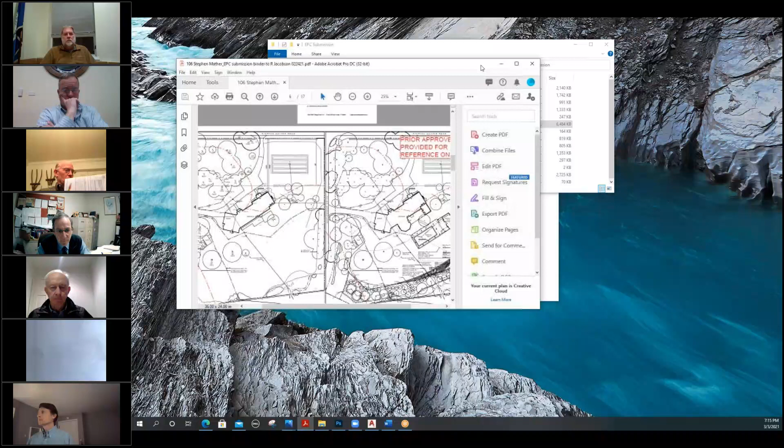And so we've submitted our plans. I'm happy to share a screen if that's helpful. I can take you through the plans. You've probably already seen them. Please share the screen. Alan, you should be able to present. There you go. You've got to make it a little larger. Please. Okay, are you able to see that now?

Yes. Oh, yeah, great. So the plan you're looking at on the screen right now is the plan that was prepared by Dan Gordon, landscape architects, in 2018, which proposed the pool house, etc. I provided it for reference since there was a history of applications and approvals on the property.

Our plan is down below, bringing the pool up closer to the back of the house and getting it further from the wetland as far as possible. This property is a very tough one because most of the backyard is regulated area with a very small area of upland review. We also rearranged the way the rain garden would work, and we're proposing a 5,000 square foot mitigation planting in the area of lawn.

It's predominantly lawn, almost this entire property. Our proposal is to remove 5,000 square feet of lawn in that lower southern area adjacent to a small intermittent creek that is back there, based on information prepared by Alan Pilch, the stormwater management engineer. On our plan we show the planting for that area, a mix of trees and shrubs, consistent with what was already proposed and approved by the prior landscape architects, which would filter runoff and mitigate that lower area.

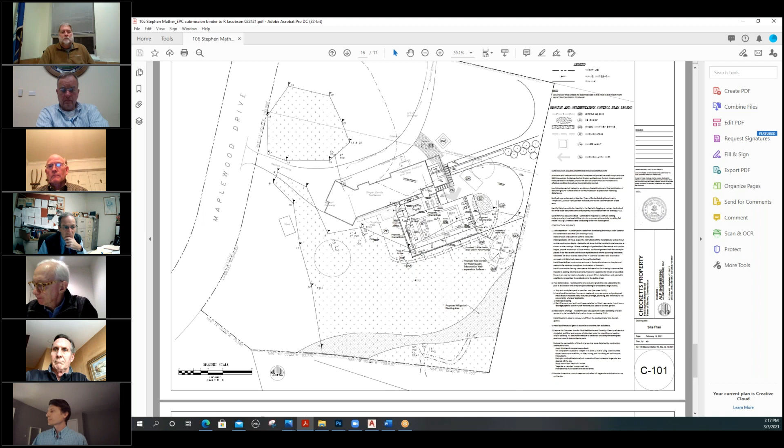The stormwater calculations have been included in your packet, as well as details regarding sedimentation and erosion control devices.

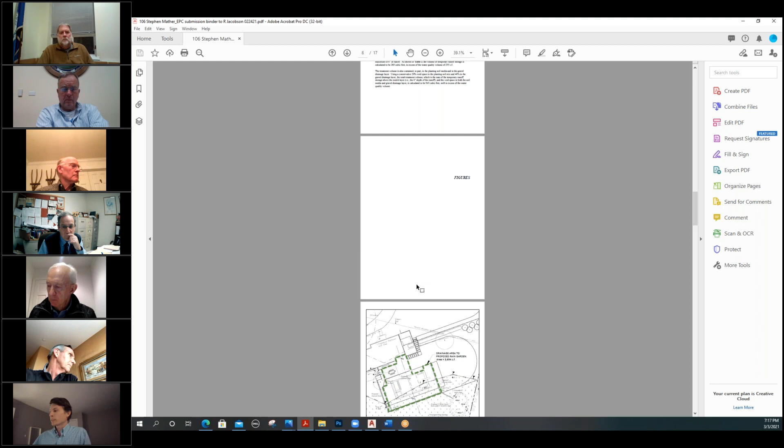As noted in my letter, we feel this is an improvement over prior applications in the sense that it's a smaller scale project. It's closer to the back of the house, and it's further out of the wetlands as much as possible on this property. Without putting the swimming pool literally a foot from the back door, it's actually impossible to locate a swimming pool on the property outside of the regulated area. So our hope is that we've put together a proposal that is less impactful on the wetland, and would make for a usable recreation space for a young family in a way that has the least impact on the wetland area.

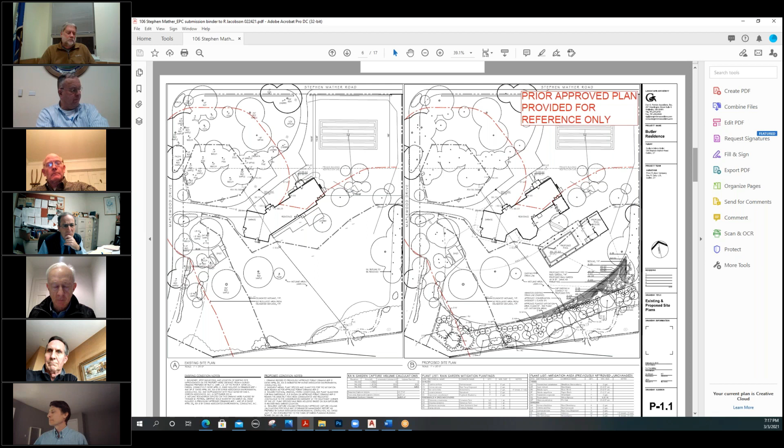I was on the commission when this was originally proposed - I forget who the people were that came in. The Butlers. The Butlers came in to get this approved, and part of the story was that they were going to provide a conservation easement in the back. To get a conservation easement in the back, and that was never done. I guess the reason was they never built the pool, so they never felt they had to do the conservation easement.

So that was the agreement, and now I guess what you're saying is the footprint is a lot less. Is there - I haven't really seen any delineation there for the wetlands, Rich, what I call the boulder line, or I don't recall that.

Alan, is there a demarcation line with a series of boulders that could be added? That's something I don't recall if that was done. Well, something could be added to the edge of the mitigation area. The edge of the wetland itself is contiguous lawn to the north and south of the line.

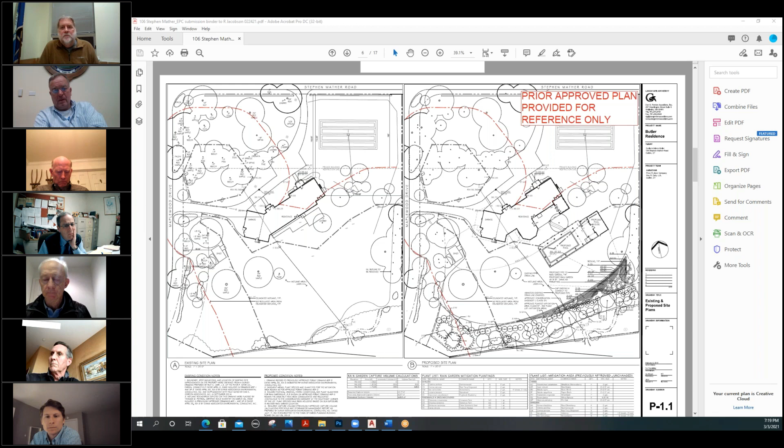Typically we ask for - oftentimes it could be a split rail fence, but it could also be boulders. I think a split rail fence would be more attractive in this particular setting because it's a pastoral location. Well, you're going to need a pool fence there anyway, so right on, you're needing a pool fence around this thing, unless you put the pool fence...

He has the proposed pool fence much closer around the pool than out this far - so I guess that's a specific request. The owner has young children and wanted a pool fence that's much closer to the pool, so that when the children go out to play, they're not going into the pool area; they're going separately out to the yard.

An additional split rail fence would - I'm fine with that. I'm fine with Alan. You can discuss it with Rich if it's a split rail fence. It's just something to distinguish that, because I'm not worried about this owner - I'm worried about the successive owners, understanding that that's a special area.

For my part, I think that quite frankly this is a better plan for a pool than what the Butlers had proposed. The Butlers had other circumstances that they needed that way, which we understood, and that made sense for them in that situation. So yeah, a split rail fence I think aesthetically would be a nice addition to the property and would also serve to mark the edge of the mitigation area for future generations that might own the home.

Okay, so Rich, now I have a question for you. Now that there hasn't - we are the conservator of the conservation area. Now this conservation area was never done, it was never consummated.

Well, at the time it was proposed, it was - again, it's all lawn. The commission recognized that, but it was a substantially larger area. And there was more fill because, as I recall, they wanted to bring it up closer to the elevation.

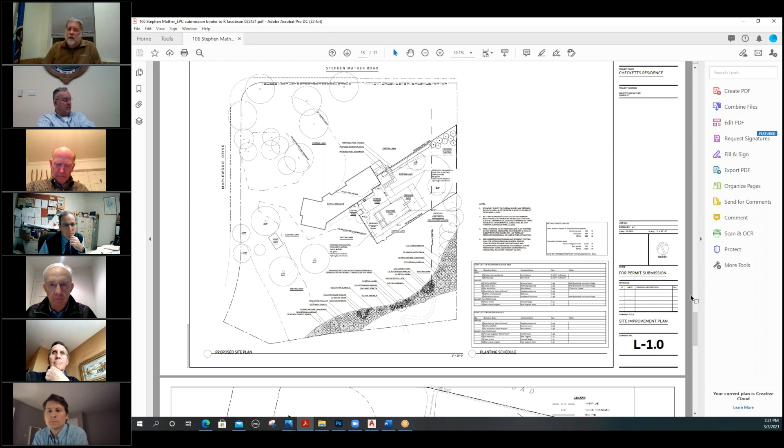So once they proposed this without the easement, I said it should be a new application. And it's their way of getting out of the conservation. I think the easement for this pool would have been overkill.

I agree with you in that sense. So anyway, the reason I jumped in is because I wanted all of the commissioners to understand that there was a little history on this property with the conservation easement, and so when you think about this, you take this into consideration.

I agree with what Rich said, that this has a lot less impact there, and I think what they're proposing planning is good. But anyway, let's go around.

Bill Wright? Yeah, I like the idea of establishing a line there with a split rail fence or something so that future generations don't go back and start encroaching. Other than that, I have no other questions.

Great. Gunnar? No, I don't have any questions. I think anything I was going to ask has already been covered.

Susan? No, I definitely prefer this proposal to the initial one. And I do like the idea of using the demarcation of the line.

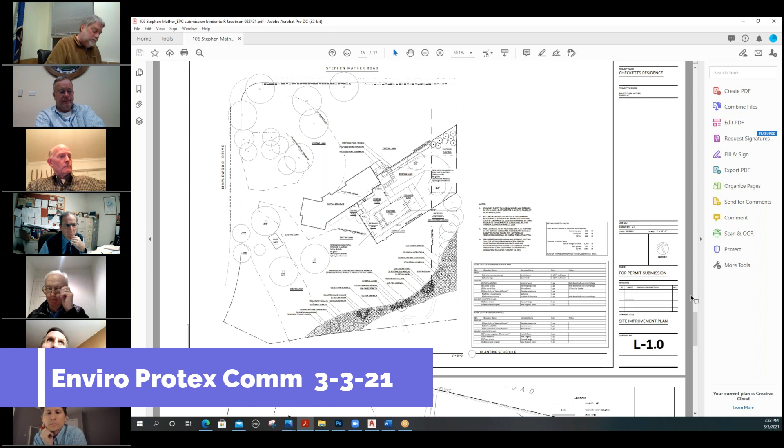Thank you. Jim? Thank you, Eric. I was out there myself this past weekend before we traveled out of town. And I think, as some of you know, I live up in this part of town, so I travel Stephen Mather constantly.

And I also found, and I think your questions helped me as well, Eric, your observations, maybe the better way to say it, from your prior experience with the Butler family, that the plan as revised that Mr. Broadbent has presented is an improvement for this particular site, and I commend the new family for the enhancements, the over 5,000 square feet of enhancements to the environment there, and I have no other questions.

I think it's a very nice plan. Thank you.

That was a good presentation, Alan. Considering that, Rich, let's write it up. Okay, and then Alan, you can talk with Rich. I think whatever split rail fence you two can agree on is fine with me.

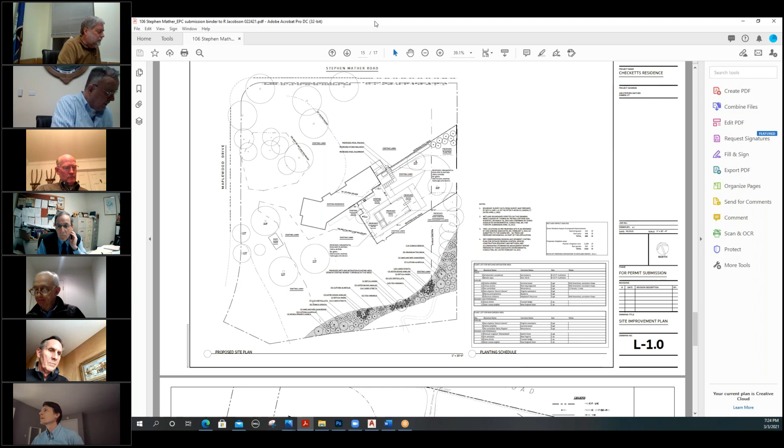Take care, Alan. Okay, next item of business is EPC 09-2021, Craig and Sue-Ann Schorr, 49 Sunswick Road, proposing a replacement house and grading related to the septic system in an upland review area. The site is shown on Assessor's Map number 62 as lots number 25 and 26.

So I will remind the commissioners that it was March 6th of last year that we had an application on this one. So, Doug, I know you're representing the applicant. Yes, I am. Jeremy, can I have the screen?

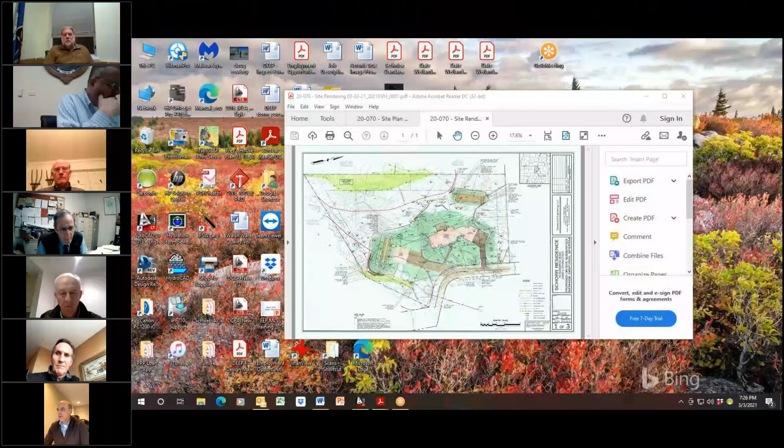Okay, good evening, Doug DiVesta, professional engineer representing the applicant. As Eric mentioned, this was before you last year. At that point, it was for a 2-lot subdivision. Since then, the owner of the property sold it to an individual family who wants to keep the property intact as it is and construct a new house on it. The property is 2.5 acres on the west side of Sunswick Road.

It has an existing house, which is hard to see on this map, but it's in the general location where my cursor is. There's a detached garage with a paved driveway going to the detached garage. Jay Fain, of Fain Associates, flagged the wetlands. So there's about 1,500 square feet of wetlands on the south side and about 8,000 square feet on the north side.

What we're proposing to do is raze the existing dwelling and construct a new dwelling in approximately the same location as the existing. The detached garage and the driveway will remain. We will be putting a new septic system in for the new house, which will be right behind the existing garage where the existing septic system is now.

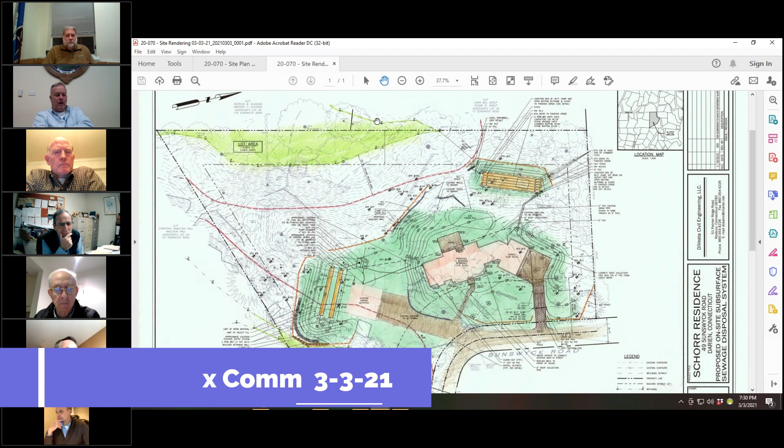The question is, what's the feeling on holding a public hearing on this? Because the building itself is not even going to get a public hearing from planning and zoning, correct, Jeremy? Based on what I've seen, there might not be a need for a planning and zoning commission public hearing because the amount of grading is very close to the house, and the other grading is solely related to the stormwater management. Is that your perception, Doug, or did you suspect that you might need to go to planning and zoning?

No, we did not expect to go to planning and zoning because, again, as a right, we can do grading around the drainage and around the septic systems. That's all. And then the grading behind the house is relative to filling in the foundation area from the existing house. So I don't see it going to a planning and zoning hearing.

I would agree with Doug, based on, this being the first I've seen of it, much scaled back over the prior proposal, which was obviously for two houses and associated septic systems and stormwater management. Based on what I see, there's no work in the flood zone. The work will not have any coastal impacts based on simple replacement, and the regrading is tight to the house and only what's necessary to put in the stormwater management and the septic system. So I would not see this going to the planning and zoning commission.

Okay, good. Thank you, Jeremy. I'd like to get a sense of the commission whether this should go to public hearing or not. My personal opinion is, I have to get my questions out later to Doug, but I'm tending to no, although I could be persuaded yes.

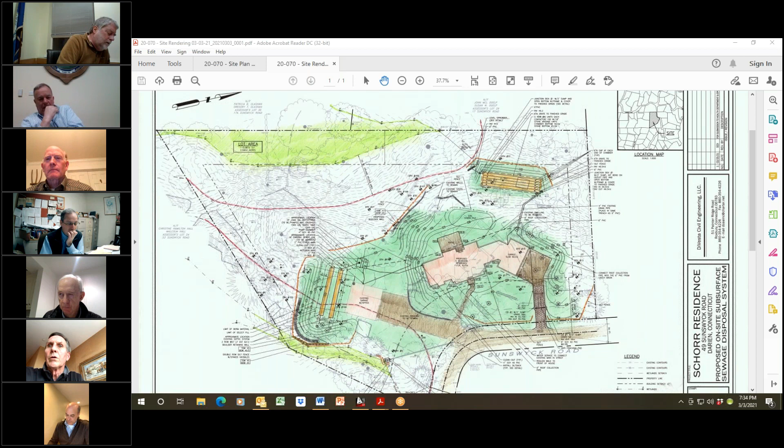Susan, your opinion? Can I just finish? Let me respond to one thought you had there. Sorry, sure, Susan, to step in front of you there. I understand that there are procedures.

Rich helps us all understand better the 15-day period that you just described. I just wonder if, for putting it on our record, we invite a public hearing. No one may attend. They may say, great new plans, glad it's not 2 homes versus 1. No public hearing, no anything. It's just, we at least stood strong and tall and invited it. We're open to it. It appears once again it's very well thought out, well planned, and within code. That's part of where I'm at.

Thank you, Susan. Well, like Jim, I do have mixed feelings given the contentious history of the original plans. But we also need to be fair to the neighbors, but also to the current owners who have put forth this well thought out proposal. Do we really want to force them? If we didn't have that prior history and this was the only plan we saw, would we want to hold a public hearing? Because if the answer is no, then I think, to be fair to the current owners, we shouldn't make them wait an extra 30 days.

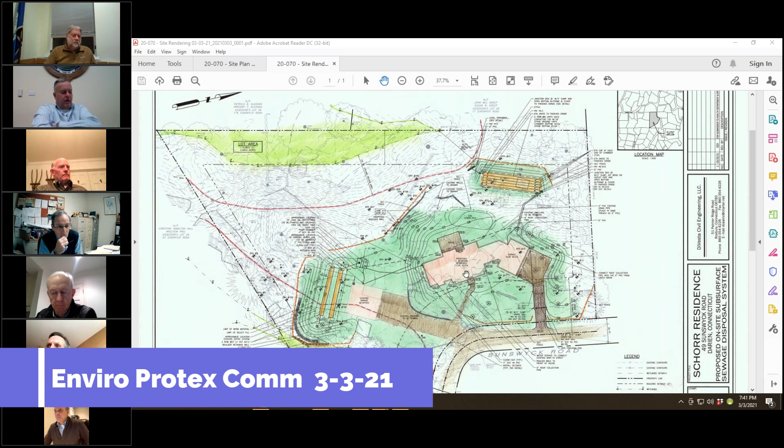Yeah, I'd have to look at my details. Mostly, I think we did have some mottling up in this area here, 17 and 18. I don't have my third sheet up, I'll pull my third sheet up. Just bear with me for a second.

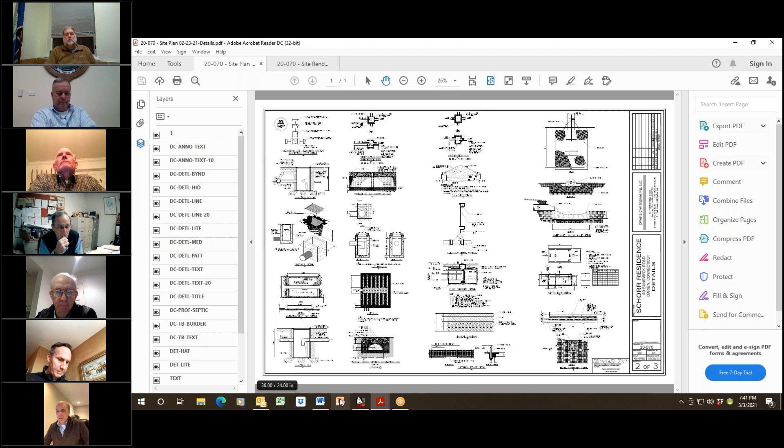By the way, Doug, who's the builder? I don't think we picked one out yet. Jacek is the architect, and I think he's on the call. I don't know if they picked a builder just yet. Okay, Jacek, do you have a builder yet? Jacek Bigoshinsky, PB Architects—no, we don't have a builder yet.

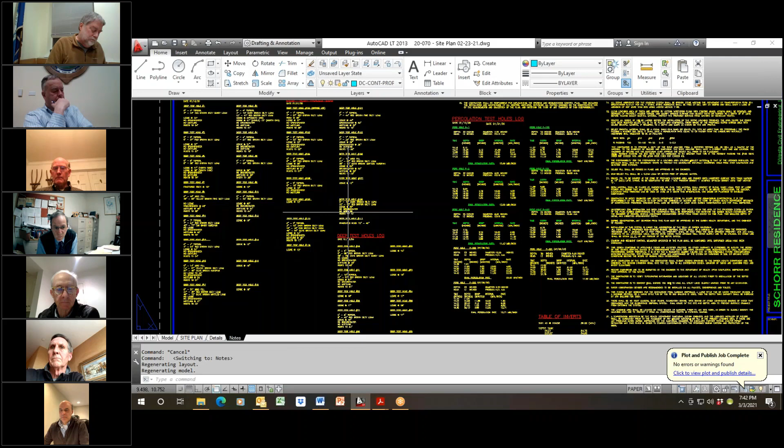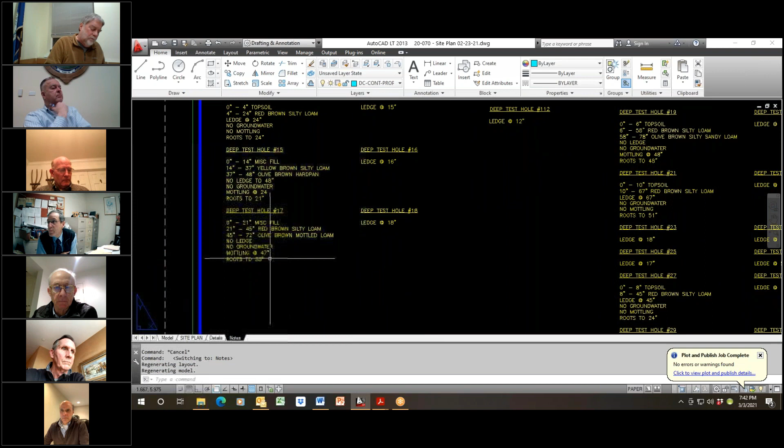Where the house is going, the new house is actually overlapping the existing one. So in terms of the regrading you see there, that's really not because of the house—it's just because of the way the grades are now. We're filling the hole that the existing house is sort of creating, or already created. The existing house has a master bedroom wing which juts out and drops off, following the grade. Once we pull that out, we'd like to restore the grade to what it probably was at one point in time. So that's really the main reason for the regrading you see there in the upper left corner, between the patio and the lower left corner of the house.

That's where Doug is pointing right now. That's really to fill that hole from the old house. And yes, there is some ledge there probably, and yes, we would like to have a full basement.

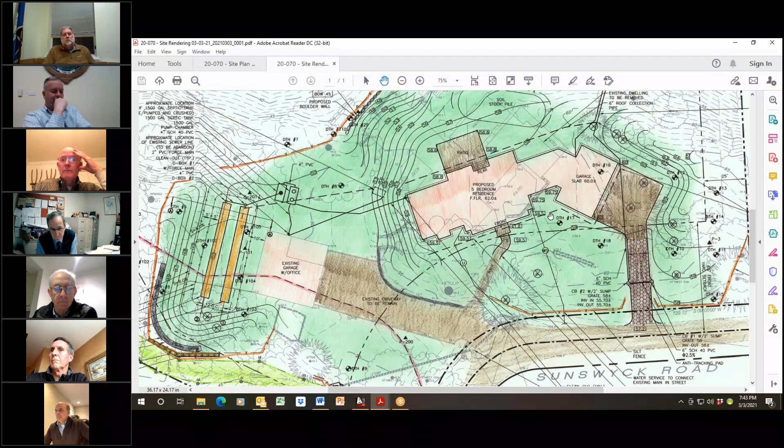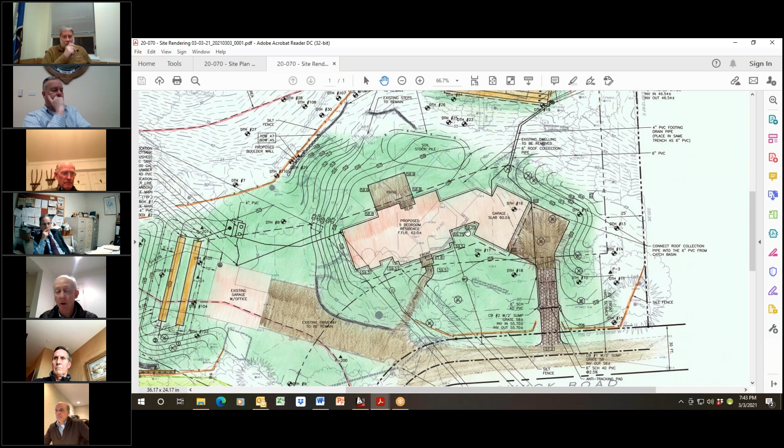So now what kind of basement are you going to make? Is that going to require sump pumps and everything else? Probably not. Well, if you look at the grades, the house is at floor elevation 62, and it drops off quite a bit. I don't think there's any groundwater there at that point. But Doug obviously would know—there are some test holes in the front of the house.

You're right. 18, this had ledge rock shallow. This had 47 inches to groundwater, to a mottling layer here on 17. That's a slab on grade right there.

But again, Jacek, the existing house has—where's my mouse, where's my thing go? You can actually see the outline of the existing house, right where it says proposed 5-bedroom. That's part of the existing house. I lost my mouse.

All right, what I'd like to do is just go around the commissioner's table here and say public hearing, yes or no. I'll be—Eric, I'll start. I thank everybody for the back and forth, very helpful to me. Susan's question hit a chord with me, and Rich's guidance as to what is needed.

I think there are procedures in town that allow neighbors who may want to address this, through Rich's description, to sign an appeal—it's not an appeal, help me with the right word, Rich—but the signatures to ask for a public hearing, versus what I said before, I was having mixed feelings on whether we should be pushing for it. I think everybody's done such a good job here. The process will reach a public hearing if it's meant to be, by the surrounding neighbors.

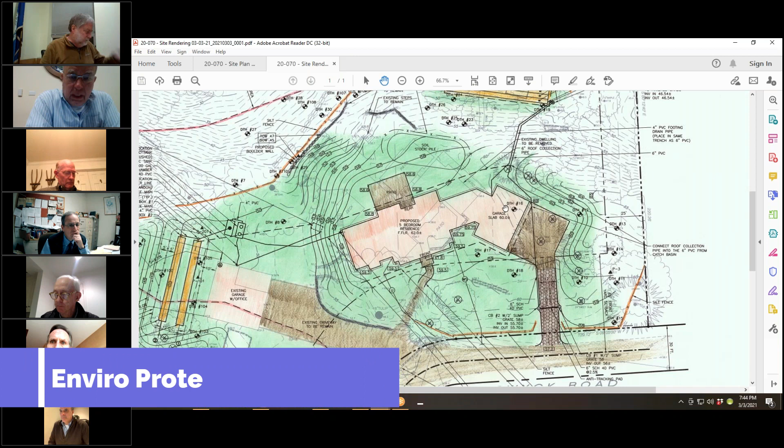Does anybody else have any questions for either Doug or Jacek? No? All right, then.

I think this is a really excellent alternative. One comment I had is I would like to see a planting plan. What Rich is saying is he would like to see a planting plan. Yeah, I'd like to see a planting plan. No problem. Something not as extensive, obviously, I don't think is required as what Matt put in the last one, unless you wanted that plan, but something at least in that other, the upland area.

By the septic system there? Yes, so what we'll agree is a condition will be that Doug or his representative will submit a planting plan to staff for approval. You okay with that, Doug? Yes, I am. So then, Rich, you'll write it up? Yep. Okay, thank you very much, Doug.

Moving forward to the agent approval, no action is necessary unless the commission receives an appeal of the approval within 15 days of the publication date per section 12.2 of the Inland Wetlands and Watercourses Regulations.

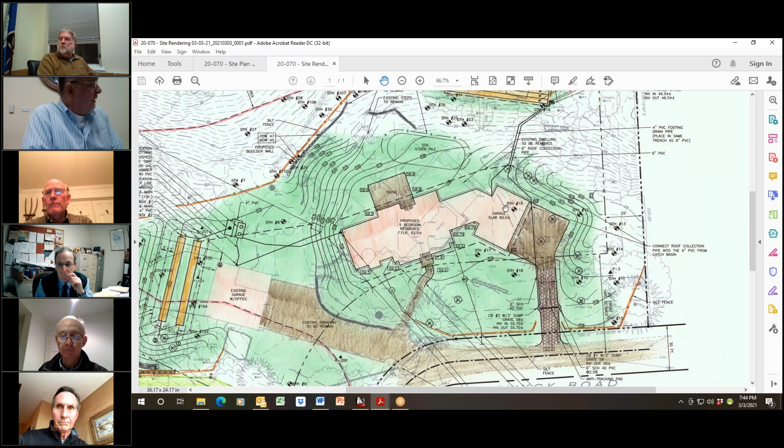Did anybody have any questions for Rich? I gotta tell you, we've received a lot of applications for Lower Holly Lane, and I remember the house on the corner had two, and across the street three.

I have a question, if I might. It's a really nice little watercourse there, and one of my pet peeves is when we've got grass coming down in elevation from the house down to this watercourse. Can we ask them to put some kind of planting along that watercourse to stop the fertilizer? Absolutely, yeah, good idea, thank you.

Anybody else? No comment from here. It's an agent approval. You can have the condition. Okay.

By the way, I've discussed the property in general with the architect. They have some large pines that are well beyond usefulness in terms of screening. Eventually they want to do a planting, take those trees down and revegetate that area, which would be a whole separate application in the future. But in the meantime, I don't know if that would dovetail in, or they could make that happen during the course of their construction. They'd have plenty of time to come up with that overall plan for that area, which I think would be good. I'll talk to them. In the meantime, I can at least have that condition.